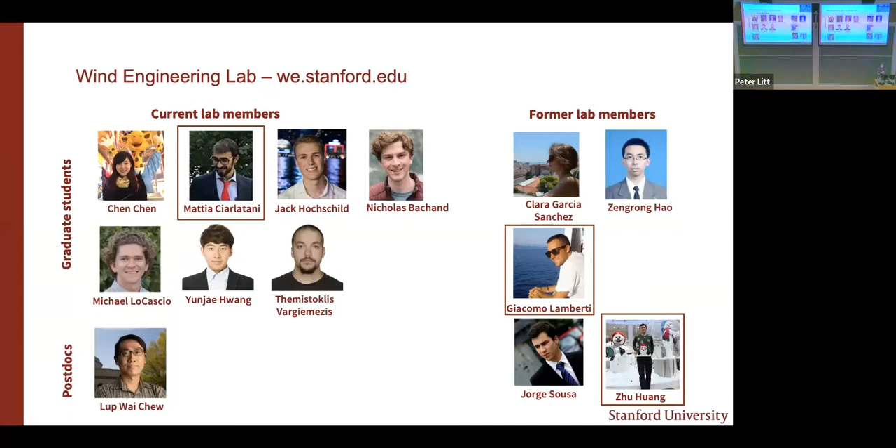I'll start by acknowledging collaborators from the Politecnico di Milano, because they provided the measurement data we've been using here, and from the Florida International University Wall of Wind, because we repeated the experiment in that facility to make sure we had double data. We have funding from NSF and the XSEDE computational resources. I also always like to start by introducing the people that actually did the work. My current lab members are on the left, and Mattia Ciarlatani is the person currently working on this topic. The former lab members, Giacomo Lamberti, contributed a lot to this work, and Zhu Huang, who was a postdoc in my lab as well.

This is the overview of the talk for today. I'll start by introducing very generally how I think about predictive computational wind engineering—what are the challenges, what are the opportunities, and what is our overall long-term goal. Then I'll focus more specifically on the topic of today's talk, cladding load predictions, discussing the specific objectives and the test case, and then we'll look at some results.

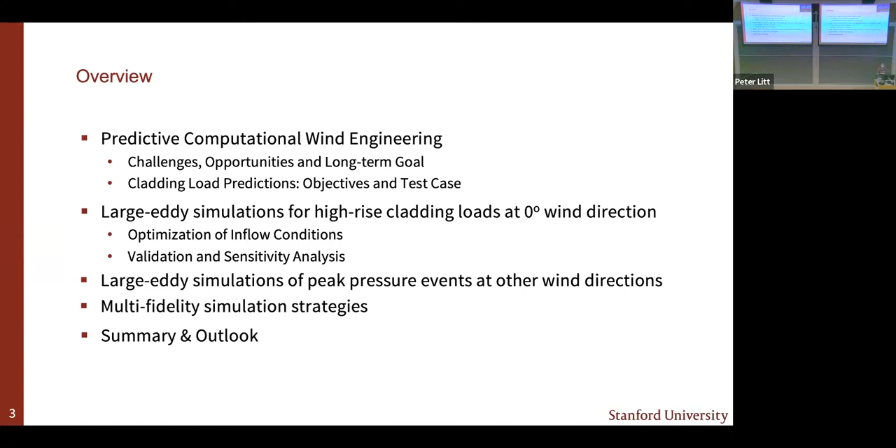I'll present large eddy simulations for high-rise cladding loads at a 0-degree wind direction, where the wind is perpendicular to one of the building facades. We'll look at how inflow conditions are very important, then validate the results and look at the sensitivity analysis. Then I'll move on to other wind directions, because the most negative peak pressure events actually occur at wind directions that are not perpendicular to one of the building facades. If I have time, I'll briefly cover some ideas and ongoing work on multi-fidelity simulation strategies, and then I'll end with a summary and an outlook.

Okay, so let's start with the overall introduction: computational wind engineering for sustainable buildings and cities, where sustainable is defined very broadly here. It means we want cities to be comfortable, healthy, energy efficient, safe, and resilient. There are quite a lot of flow challenges that play a role in making cities sustainable.

A very common challenge looked at in wind engineering is pedestrian wind comfort and even pedestrian wind danger, because when you put up a new high-rise building in a city, you can locally get speed-up of the wind flow around the building at pedestrian level. That can cause uncomfortable conditions, but also very dangerous ones—people have actually died from unsafe wind conditions and being blown over by wind. Many municipalities have criteria that must be satisfied during the design before you get a building permit. Traditionally, these things are studied in the wind tunnel, but computational methods could do that as well.

The second challenge is pollutant dispersion—thinking about how pollutants released within the urban canopy disperse through a city, and what that means for air quality and health. We also have natural ventilation, which looks at using the natural resources of wind and buoyancy to drive flow through a building. It's important both to reduce energy consumption for heating, ventilation, and air conditioning, and for health. We've known that for a long time, but I think the recent pandemic has made that very clear to the general public as well.

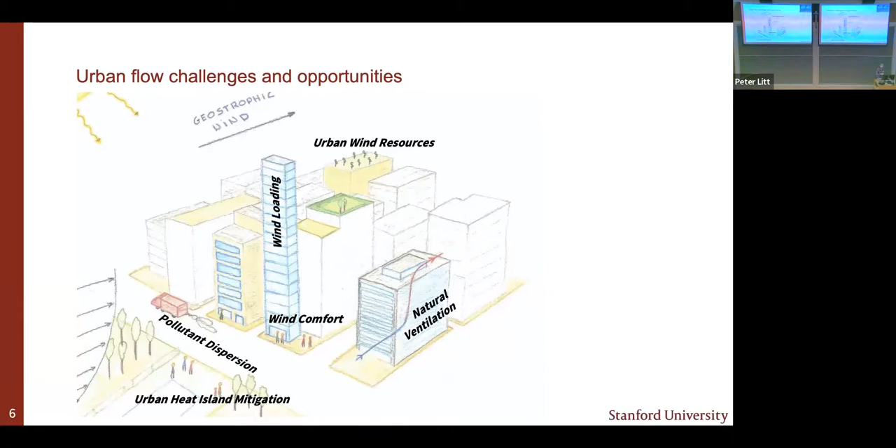And then the topic of today's talk is wind loading, and that really looks at how can we make our buildings more resilient to extreme wind events. And it's actually a very important topic.

In 2020, the insured loss due to extreme wind events was $57 billion. And most of the damage started by one of the cladding panels on a building facade or by cladding failure on a building facade. And once that happens, you get rain intrusion, which always comes with a high monetary loss afterwards. And you can get further failure because once one of the cladding panels fails, you get internal pressures as well in the building, and if one roof tile disappears, the whole roof is likely to be broken.

And it's a very interesting problem from a fluid mechanics perspective as well. That's what you see on the right in that graph on the bottom. It shows you a pressure coefficient, which is the non-dimensional pressure on a point on the building facade as a function of time. And you see that you get these very negative suction peaks.

So those are the ones that will really pull off these panels from the building facade. And it's tricky to measure these in the wind tunnel - to really understand, if you measure the pressure at one point, that is like a minus 10 CP, what does that mean for the load on an overall panel? And these are, of course, also challenging to predict in CFD.

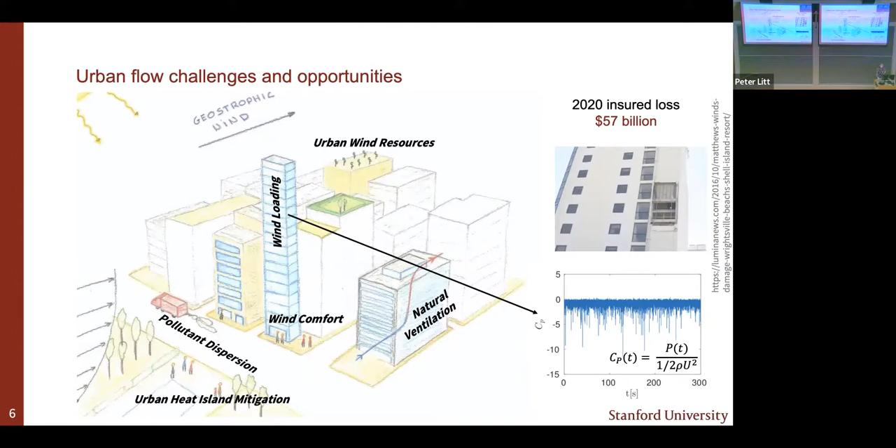So all of these problems have two challenges in common when we're trying to do the predictions. The first one is that you have a lot of variability in meteorological conditions. The flow in this city is driven by what happens at the larger scale in terms of the weather, right? And that is inherently variable.

So if you're trying to predict this, you need to have an understanding of what changes in weather will mean for the quantities of interest that you're trying to predict. The second is that we're dealing with very complex flow physics, right? This is a very high Reynolds number turbulent flow with very complex geometries. And then often you also get multi-phase effects.

In pollutant dispersion, you're looking at pollutant transport. There might be chemical reactions. For urban heat island mitigation, you would have to think about evaporation, condensation, etc.

There are also a lot of opportunities to try to predict these flows better. As we get more and more computing power available, we're able to run more accurate simulations, and we're also able to run more simulations, which means that we can start leveraging tools from uncertainty quantification.

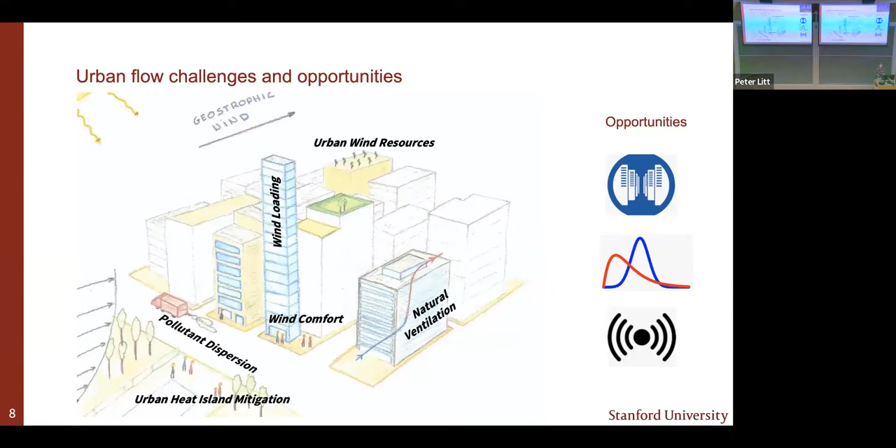And we can also start to think about data assimilation because we see more and more sensors being put up in urban areas that actually give us data in terms of local wind speeds, local temperatures, etc. So all of these actually mean that we can really start thinking about using computational fluid dynamics to do predictions of these quantities of interest.

And that is really our long-term goal in the lab: to establish efficient predictive modeling frameworks that can quantitatively support the sustainable building, design, and urban planning process.

And to achieve that goal, we're going to use tools from uncertainty quantification and data assimilation, and focus a lot on validation with field measurements, because the field measurements really represent the full complexity and variability of the problem that you would see in real life.

If you take something out and you put it in the wind tunnel, you're removing a lot of that variability and complexity.

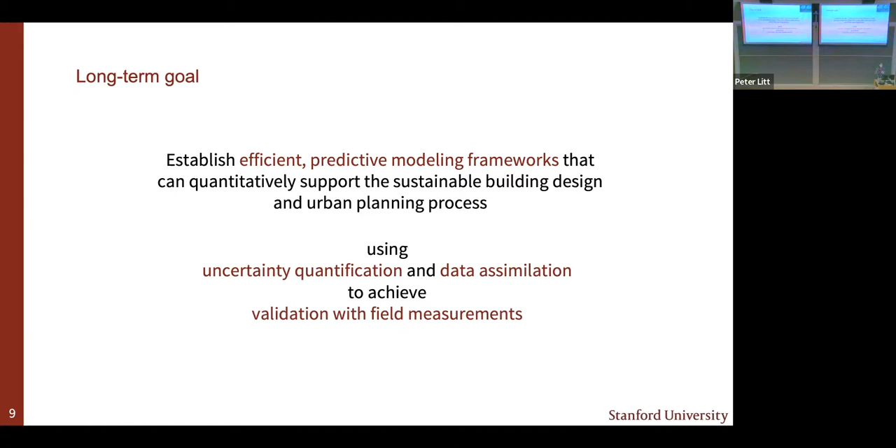Then we do propagation of these uncertainties by running a larger number of deterministic simulations, and you combine that information to get predictions of probability distributions for your quantities of interest. And then we can validate that against field measurements.

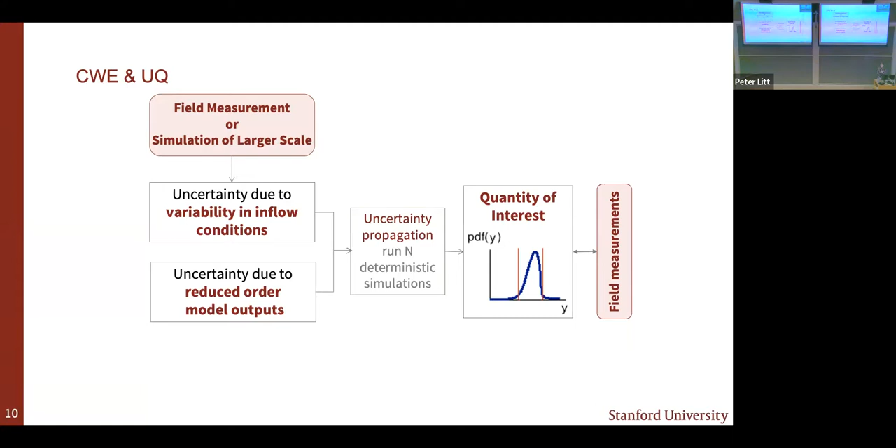And when you think about these two types of uncertainties, the inflow conditions is kind of a multi-scale problem, right? So there we're going to rely either on field measurements or on simulations of the larger scale weather forecasting simulations to understand what that variability in the inflow conditions is.

On the other hand, uncertainty due to the reduced order model outputs is more of a multi-fidelity problem. So there you'll have to look at high fidelity simulations or experiments to understand better what that uncertainty is and how you could characterize it.

And then lastly, we have the data assimilation. So if you do have field measurements, you can compare that to your quantities of interest and then couple back and really get a better understanding of what these uncertainties are in the field you do measure.

So whenever we develop frameworks like this, we start from an application, because the quantity of interest is really going to determine what the most important uncertainties are and how you're going to set up these frameworks. And we've kind of completed this whole loop on the topic of pollutant dispersion and the prediction of pedestrian wind.

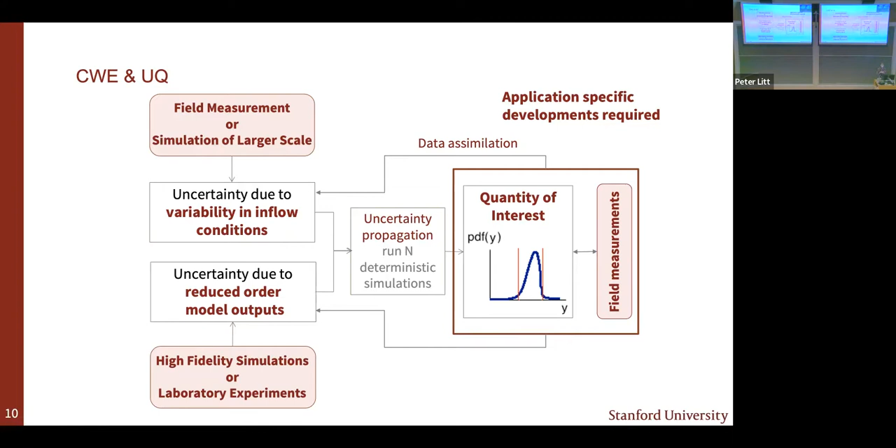And for natural ventilation, we've done all of the components as well. But when we started looking at wind loading, we realized that this is too far ahead. First of all, we don't have field measurements available of wind pressures on high-rise buildings. And second, we start from the point that we have some model that we trust at giving a reasonable prediction.

And currently, CFD is not accepted as a design tool for calculating wind loads on buildings. So our starting point was really these two observations: we don't have full-scale measurements on high-rise buildings, and CFD is currently not accepted as a design tool.

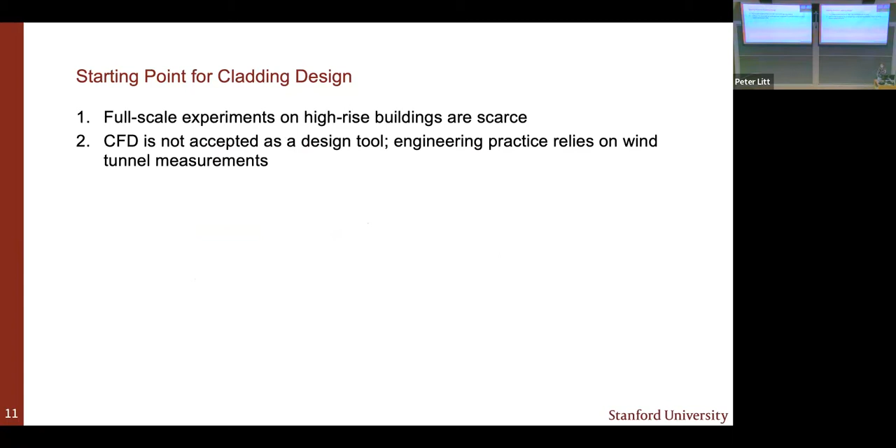So we took a step back and looked at what happens in these wind tunnel experiments, because that is really the way that engineering practice is going to calculate these wind loads. They will record pressure time series simultaneously in several points, usually up to 500 points, on the surface of a building - on the reduced scale model.

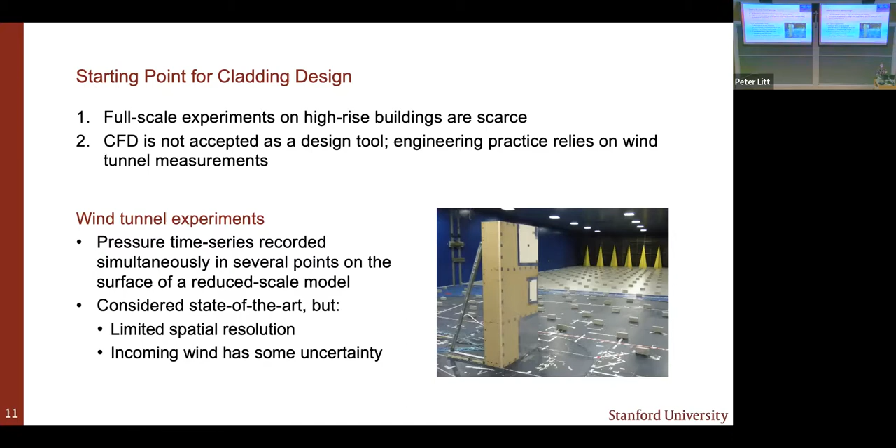This is considered state of the art, but even though they have 500 points, there are more than 500 cladding panels on the building, right? So they are limited in spatial resolution. And then second, there is some uncertainty in the incoming wind in these wind tunnels as well. They try to reproduce what is considered a full-scale wind field, but there are challenges in that - it's a little bit of an art.

So CFD really has something to offer here, right? If I put enough resolution in my simulation, I can actually calculate area average loads on the panels of the building directly. Now, the downside is that turbulence modeling is really key in this problem.

If you remember that signal of CP that I showed you in the beginning with these very negative pressure peaks, that is really due to turbulence in the flow. So if we want to predict these negative suction peaks that will determine the peak loads, we really need to think about it carefully. And we have two options there.

One is to go to Reynolds averaged Navier-Stokes simulations, which model all of the turbulence and solve only for the mean flow. That's going to be fast, but relatively inaccurate - or in this case, even very inaccurate - for these turbulent quantities. The other option is to go to large eddy simulations, where you resolve the larger scale turbulence in the flow.

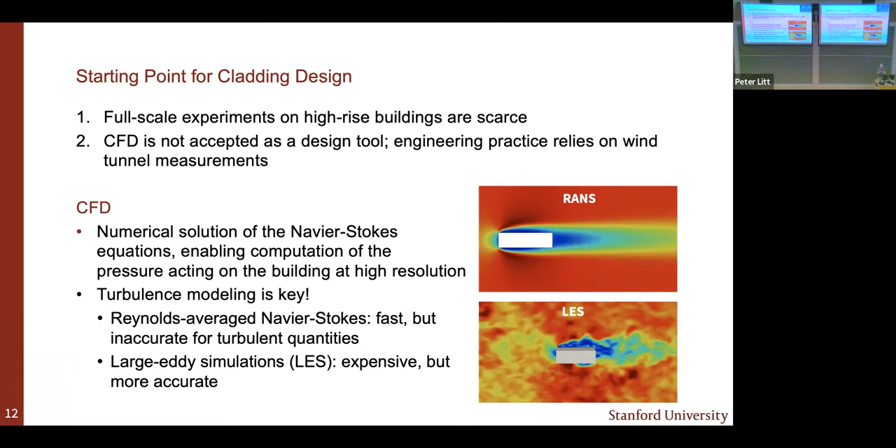And you will start to see these negative pressure peaks, right? That's going to be more expensive, but more accurate. Given the overall distrust still in the community with respect to CFD, we decided to go for the second approach. We're first going to show that if you take a good model, you can actually predict these pressure peaks as you do in the wind tunnel.

So this has been our starting point here. I've reduced the framework, and because we go to high fidelity simulations, we're not going to think right now about uncertainty in the reduced order model outputs, but we are still going to think about uncertainty because there is variability in the inflow conditions. And then we're going to validate with a wind tunnel measurement.

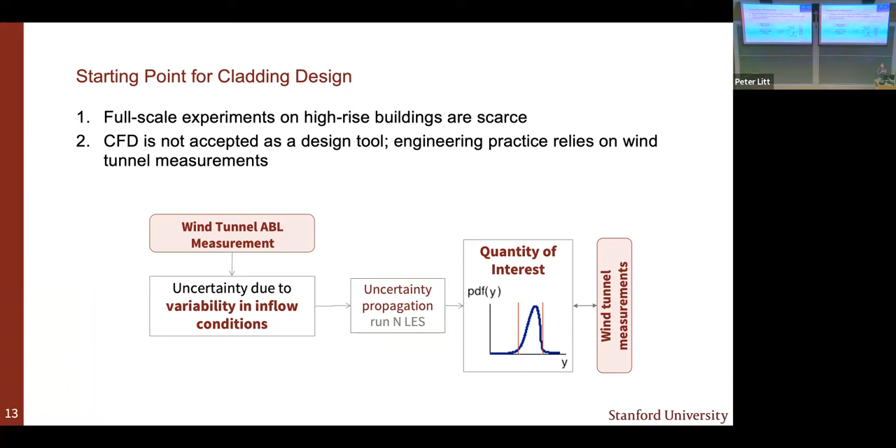So we have wind tunnel measurement data available. We are going to look at what the uncertainty in the boundary layer in the wind tunnel was, and then propagate that through the LES.

So to do this, we selected this test case. It's a rectangular plan building. It was put in the atmospheric boundary layer at the Politecnico di Milano, in the wall of wind. The building was 2 meters high, 1 meter long, and 0.3 meters wide.

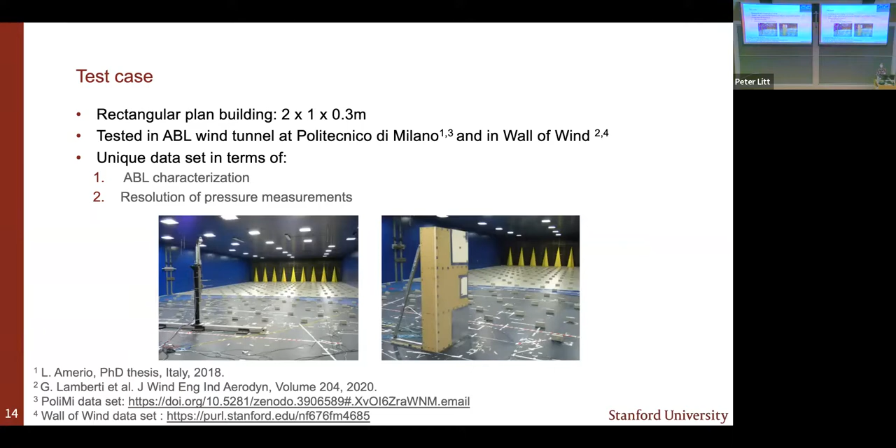So in terms of that characterization of the boundary layer, they did 3D measurements. Are there questions in the meantime that you want me to address, or not really? Okay.

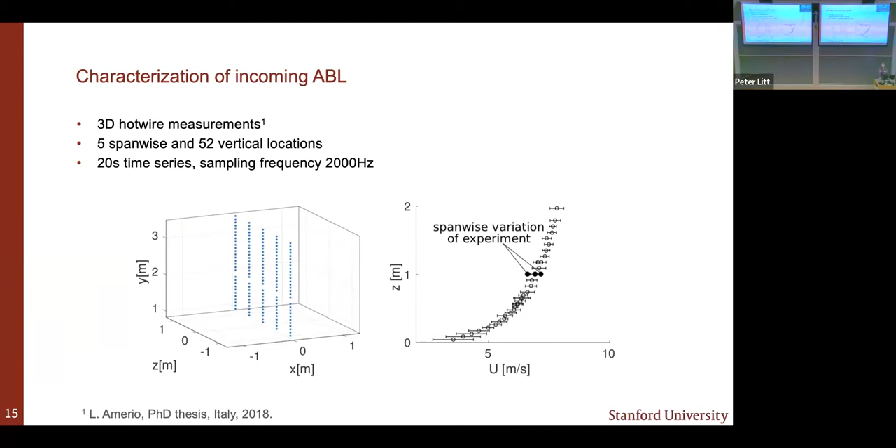There are 3D hot wire measurements at 5 spanwise locations and 52 vertical locations, with 20-second time series sampled at 2000 hertz. This allows us to look at profiles of mean velocity, as well as turbulence intensities in the 3 directions, and see the variation in the spanwise direction, which is a measure of uncertainty in that boundary layer in the wind tunnel.

The pressure measurements are shown in more detail here. They focused on these 2 tiles, A and B, and you can see a zoomed-in picture of how high the resolution on these tiles really is. We have 300-second time series with a sampling frequency of 500 hertz.

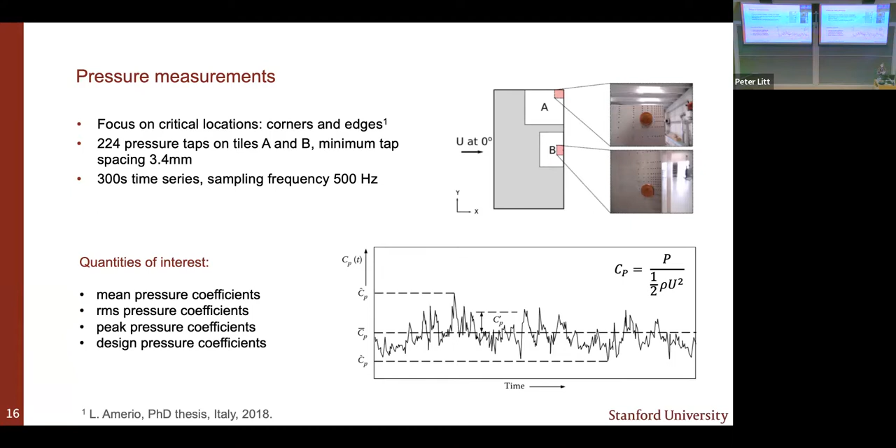Our quantities of interest are the mean pressure coefficient, so we look at pressure coefficient time series, the root mean square fluctuating pressure coefficient, CP prime, and peak pressure coefficients. The peak pressure coefficients are obtained by doing extreme value analysis of that time series. Then there are design pressure coefficients, which I'll explain later how we get exactly.

Let's look first at the 0-degree wind direction, so the wind perpendicular to the building. We started by running these simulations with OpenFOAM because it's a code that is very widely used by the community. If we could validate that we can do these predictions, that would really have an impact on what engineering practice could do.

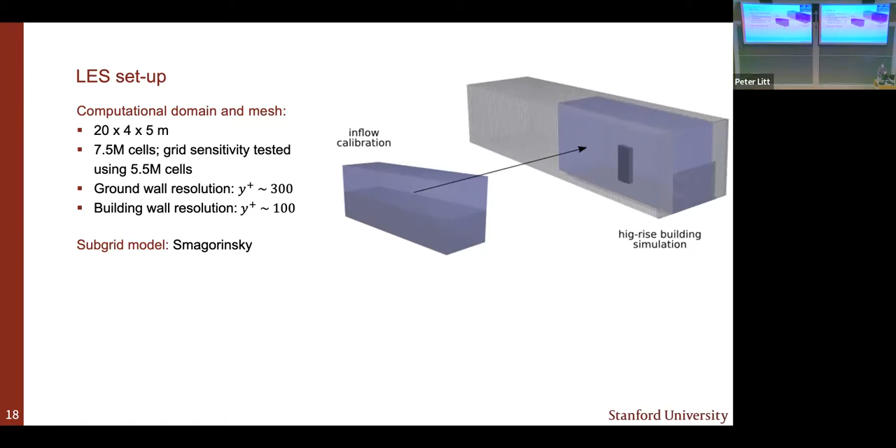Our domain is 20 meters long, 4 meters high, and 5 meters wide, similar to the Politecnico di Milano wind tunnel. We have 7.5 million cells, and we checked grid sensitivity as well. We use a very simple standard Smagorinsky subgrid model. This is some detail on the schemes and the time stepping.

The simulations took quite long, and we couldn't really speed that up much more because the main challenge here is that we need really long time series to do our extreme value analysis. So we've maxed out on the scaling in terms of parallelizing it, and we'd be using more CPU hours while only reducing the time a little if we went to more processors.

Our boundary conditions are periodic at the sides, no slip on top. We have a smooth log-law wall function on the building and a rough wall function on the ground. But the most important one is that we know the pressure coefficients are sensitive to the turbulence in the incoming flow, so what do we do at the inlet of the computational domain?

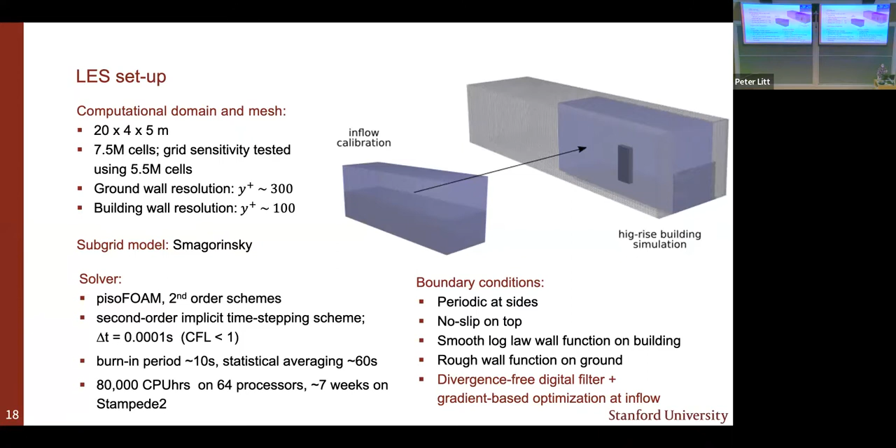We use a divergence-free digital filter, but we combine it with a gradient-based optimization to make sure we really get the quantities we want. So how does that work?

The digital filter is a version proposed by Kim in 2013, which specifies a mean velocity profile that is a logarithmic law as a function of height, as expected in a wind field. Then we add a fluctuating field on top of that, a function of the Reynolds stress component magnitudes and the time scales for the U, V, and W components. You generate a random field that is filtered to achieve these correlations with the desired length and time scales, and scale it using these magnitudes of the Reynolds stresses.

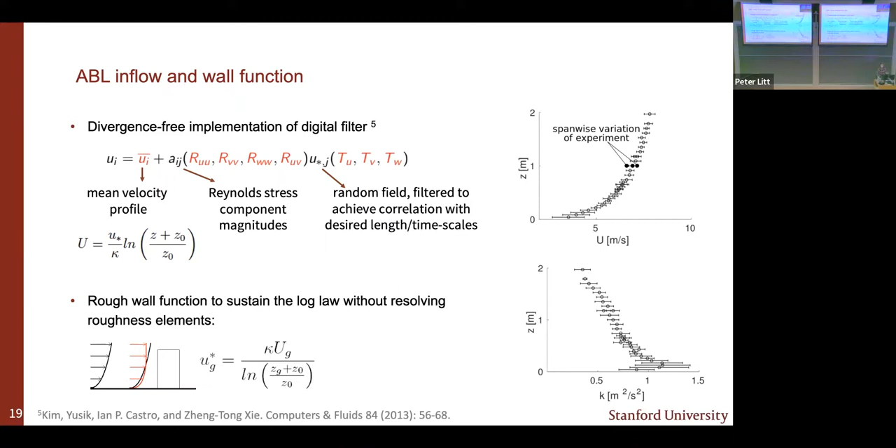In addition, we use a rough wall function so that we sustain that log-law without having to resolve the roughness elements you saw in the wind tunnel, which would make the simulations a lot more expensive. This sets up the inflow very nicely, but you run into a problem common with these synthetic turbulence generators: the synthetic turbulence is not a solution of the governing equations, and as we move downstream in the domain, you see a decay of that turbulence intensity.

So now if in the future I put a building in my simulations, I'm very likely going to see much lower fluctuations in my pressure signal because I have lost that turbulence.

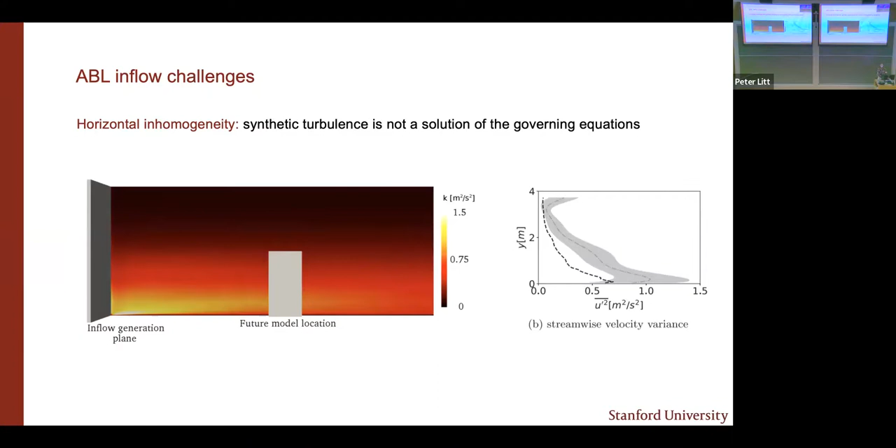So we did a relatively simple workaround: you specify that inflow, then look at what the statistics at the building are in a simulation that doesn't have a building, but at the future building location. You check how those values compare to what you had in the wind tunnel experiment. If that's good enough, you go ahead and run a simulation with the building; if not, you do a gradient-based optimization adjusting this until you satisfy the criteria.

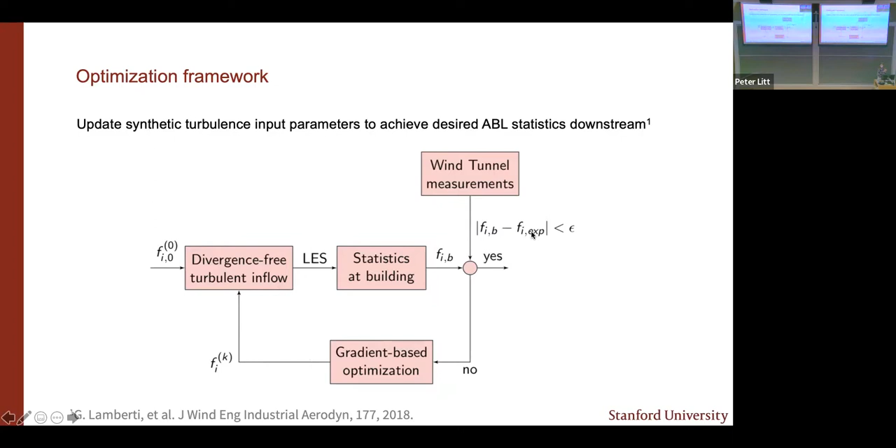That works really well. And it also gives us a tool to start looking at sensitivity analysis. So that's what we did as well.

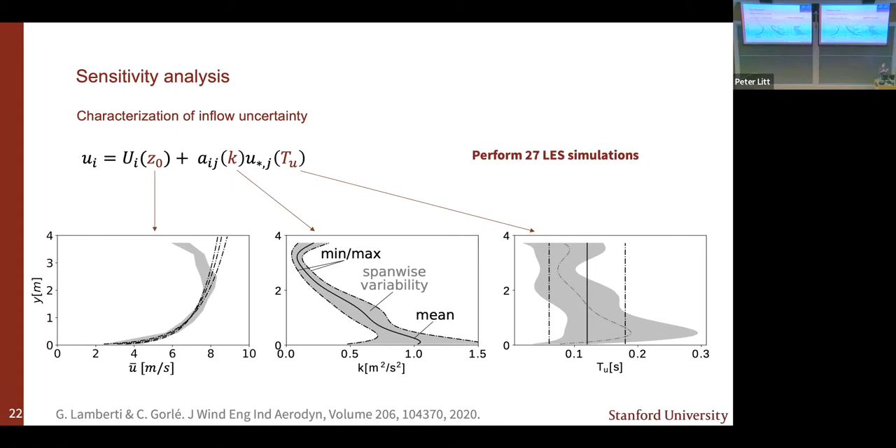We characterized the inflow uncertainty by having 3 uncertain parameters in the inflow. The first is the roughness height, which changes our mean velocity profile shown in the plot on the left. The second is variability in the overall level of turbulence kinetic energy in the flow. And the third is that we changed the time scales to vary corresponding to the variation we saw in the wind. We ran combinations of all of these: 3 values for each parameter, giving 27 simulations in total.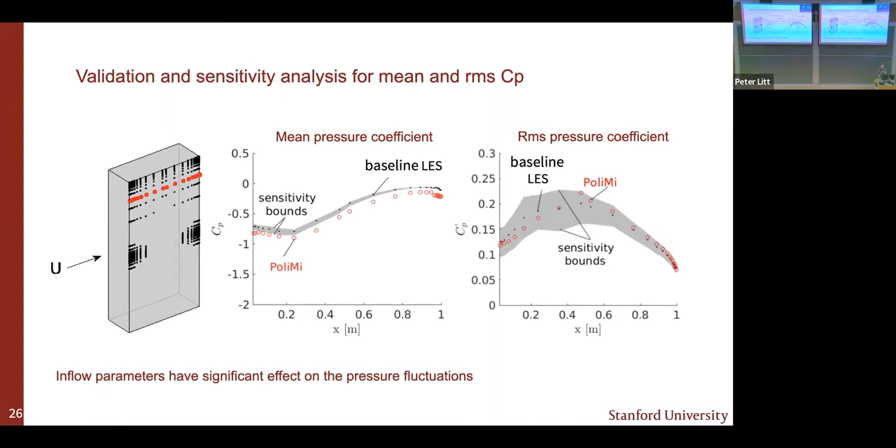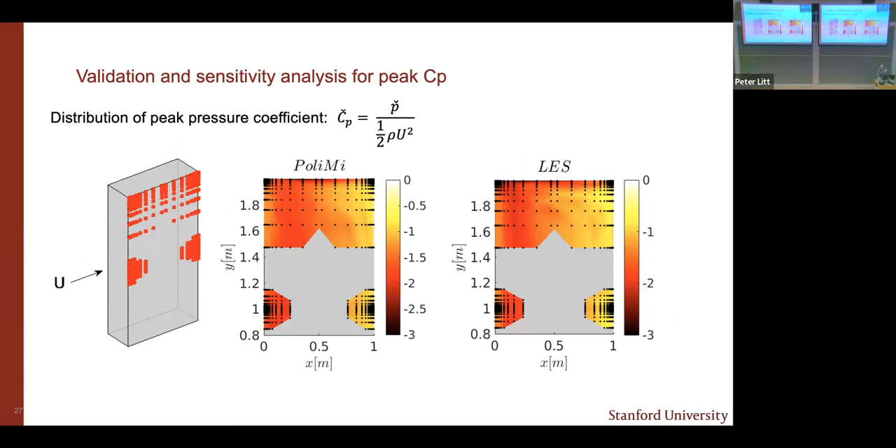Then if we look at peak pressure coefficients, we see that the LES reaches as negative values as the experiment. This picture shows the most negative values we got in the 27 simulations. If we compare the baseline LES to the Milan experiment, we're slightly under-predicting these peak pressure coefficients, but again the sensitivity bounds explain a lot of the discrepancy. The other important thing to note is that we're still doing an LES, solving filtered equations, so we shouldn't expect to resolve these peaks as negatively as in the wind tunnel experiment.

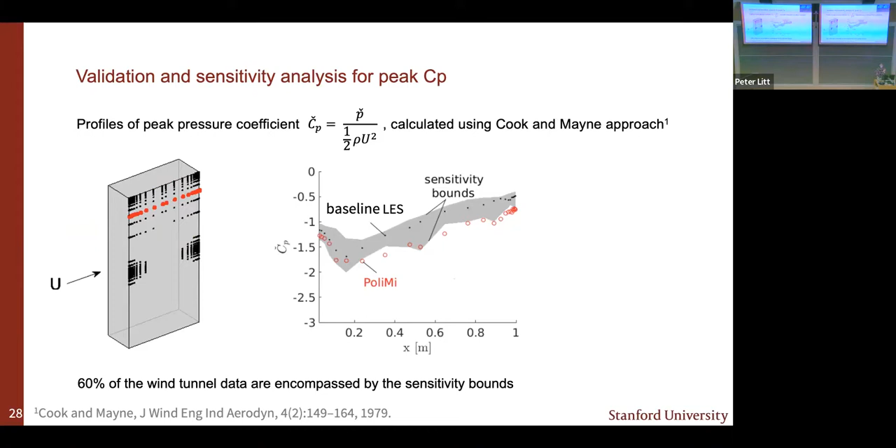You could try working with subgrid modeling to account for that difference, but the question is, is that important from a design point of view? From a design perspective, you don't care about the pressure at one location, you care about the overall load on the cladding panel. That's what is being shown here.

This is a panel at the mid-height of the building, and the red dot is the pressure tap where we're plotting the raw data, shown as the yellow curve, for two different time series where we saw a negative peak. If you take the area average on the panel, shown in blue, you get the blue curve, and you're actually filtering out these peaks, which is what your large eddy simulation is doing as well.

If you have enough pressure taps available on a panel, you can calculate that area average. In most wind tunnel experiments, they wouldn't have that, so instead they do a time filtering, using a time scale for the filter that is some constant multiplied by a length scale, usually the diagonal of the panel, and the free stream velocity at building height. That is actually one of the main challenges in the wind tunnel: determining what that constant should be.

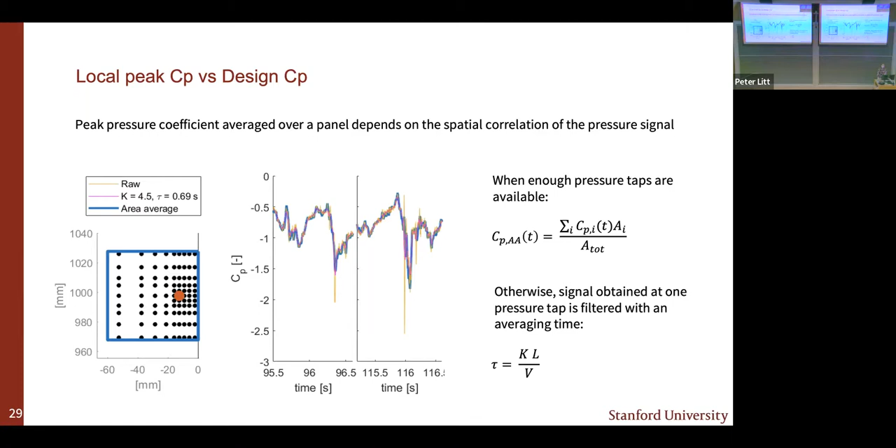Because you see here that the 4.5 value, which is the magenta signal, corresponds quite well to the area average, but the constant actually depends on where you look on the building facade, what wind direction you're considering, etc. So with CFD you wouldn't have to do any of this, right? Because you can always calculate the area average load as long as you have a reasonable number of grid cells on a panel. And that's the comparison I'm showing here.

So we look at the 0-degree wind direction at the top corner here, and we look at different panel sizes, going from very small panels to much larger panels. That's what you see on the x-axis here, small panels to larger panels. And then the area average peak pressure coefficient on that panel is shown here.

So we did an extreme value analysis on that area average signal, and you see that now the sensitivity bounds really fully encompass the data that we have from the experiment. So the LES can predict these peak design loads on panels really well, quantitatively.

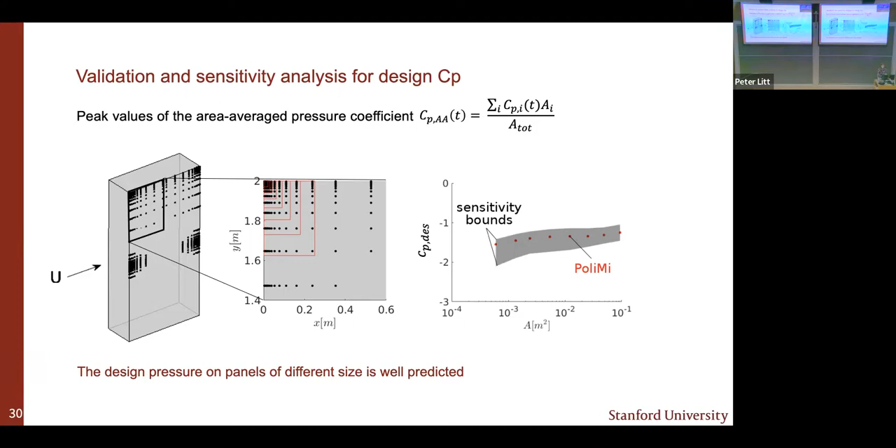So that concludes the analysis for the 0-degree wind direction, where we've shown that LES can reproduce these pressure coefficient statistics, and we can directly calculate peak pressure loads over areas of interest. We've also shown that the root mean square and the peak values are highly sensitive to the turbulence in the atmospheric boundary layer flow at the building location. So you can't just look at the inflow, you really need to think about what happens at the building location, meaning a very careful calibration of these inflow conditions is needed.

So what are the takeaways here? Experimental data sets should really report detailed boundary layer turbulence characteristics, including uncertainty intervals, because if you don't have those, it's going to be really tricky to do validation. The LES should then account for that uncertainty when comparing results.

It also tells us that we need to do more full-scale measurements in real atmospheric boundary layer flow and in real extreme wind events, because the relationships being used right now to determine turbulence intensities and turbulence length scales start from the idea that you have a synoptic high wind speed. It doesn't account for what happens in a downburst or in a hurricane, etc., and those turbulence characteristics might be quite different, which would really affect what peak pressure loads you're going to see.

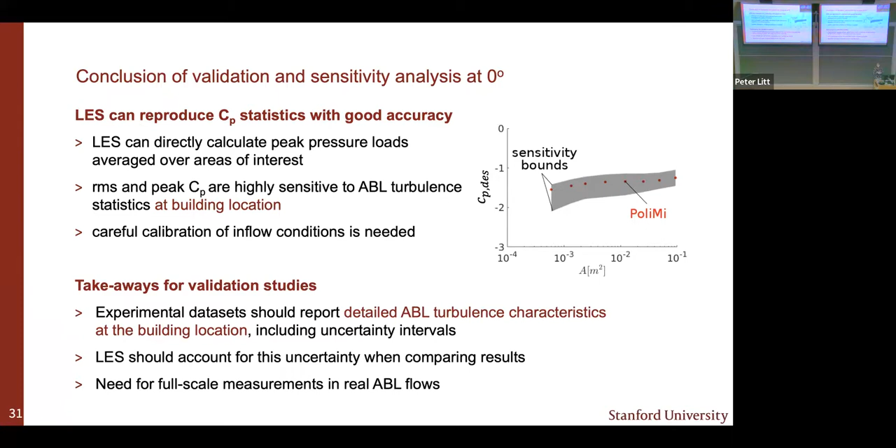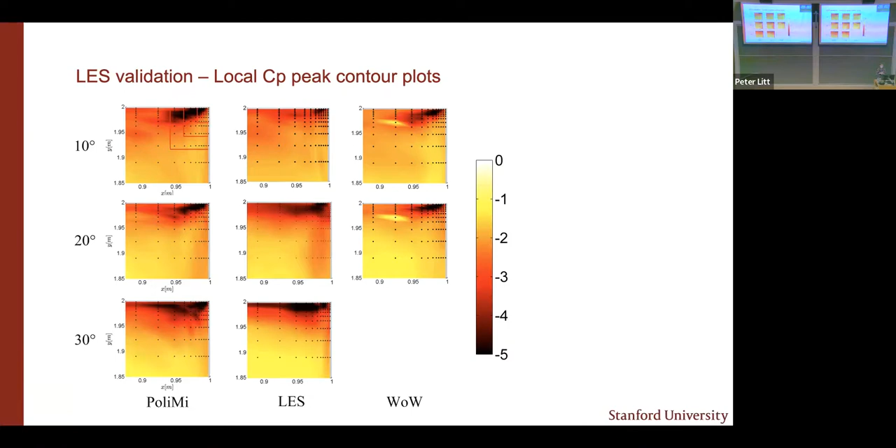So the validation is done with this, right? Now the idea is, can we understand better what is really happening? The way that we looked at the flow is by plotting these isosurfaces of Q criteria, and then we colored the eddies by the sign of the X component of the vorticity, which basically tells you the rotation of the eddies. So you could expect that if you have two eddies rotating in the same way and they merge, you're going to get stronger, right?

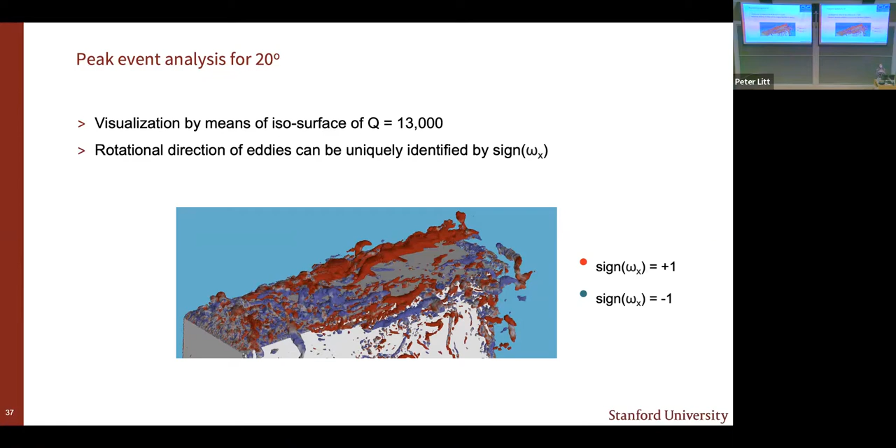So you're going to get these more negative pressures. That's what you'll see in this movie. The wind direction is from here, and you get this big vortex overall along the edge. But you also get a lot of shedding further downstream, and these structures kind of move over the roof and then over the edge and join the structures on this side.

This is a back view, so this corner here is the same as this corner here. We have time series at 3 pressure taps near this back corner, shown here—tap number 1, number 2, and number 3. This is the contour of the instantaneous pressure coefficient. I'll play this once, and then go back and stop it at a few critical locations.

You see that this structure causes this very negative pressure, right? And if you look, you see some of these very negative spots. Now you get a very negative, very local peak. You're going to see one coming up here as well, a very negative peak. And then the most negative one is actually seen right at the corner of the building. So if I go back to what you see there—this is always a little challenging.

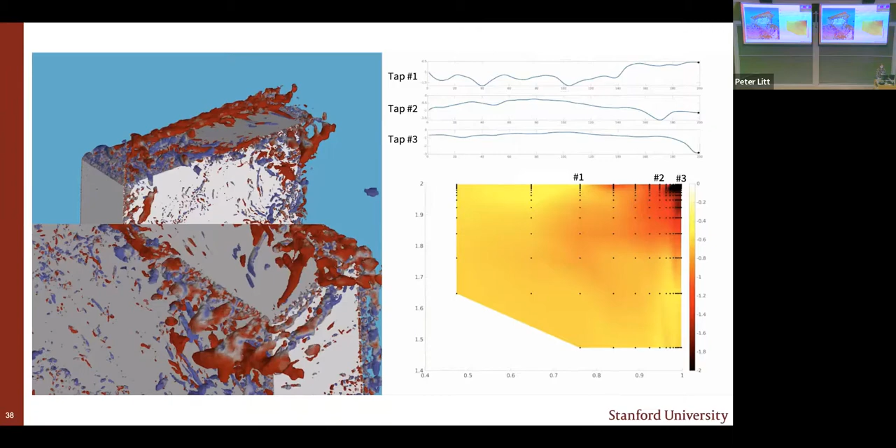So the simulations can not only predict these, but they can help us look in more detail at what is happening. We're still working on processing this data and getting more insight from it. The conclusion for these other wind directions is that we can reproduce the CP statistics with good accuracy at all the wind directions, including highly localized extreme suction events, given that we have a sufficiently fine grid resolution. That is, of course, very important.

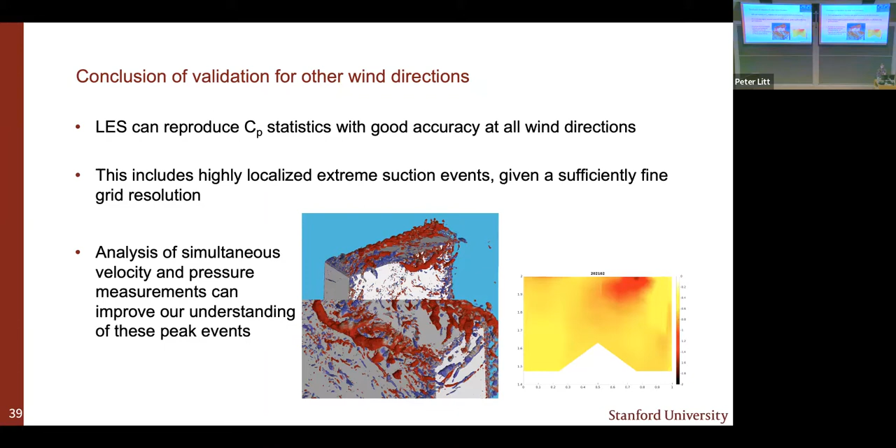And then finally, the LES simulations allow an analysis of simultaneous velocity and pressure measurements, which is really difficult to do in a wind tunnel. That can really help us improve our understanding of these peak pressures. Okay, so I do think I have time to go into the last section here.

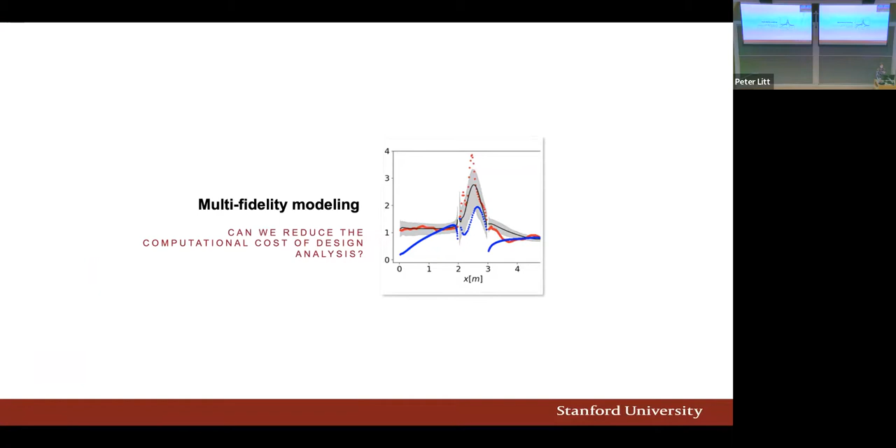I'll talk a little bit about multi-fidelity modeling, because we've seen that LES can do this, but it is, of course, quite expensive. The Charles simulations took us about 4 weeks. If we're not trying to really resolve these very localized events, we could probably reduce it to 2 weeks, maybe get it under a week.

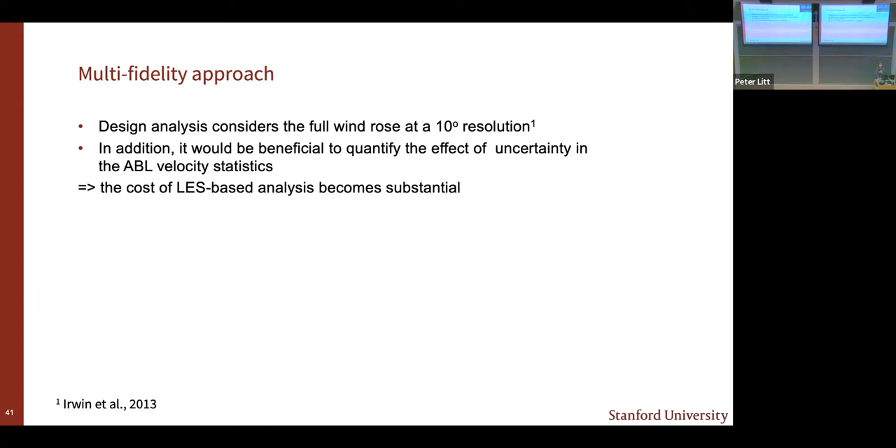But we would still have to do the analysis for all of the wind directions, and generally this is done with a 10-degree resolution. In addition, we've shown that the results are very sensitive to these boundary layer characteristics, so you would like to do some sort of uncertainty quantification there as well. So we're talking about running 36 simulations, and then maybe 3 times 36 to look at uncertainty, right? So that cost becomes very substantial.

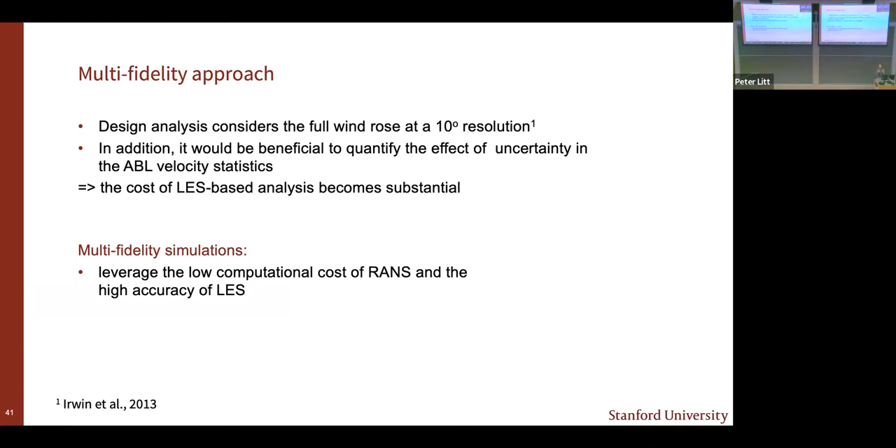So the idea is if we can leverage the low computational cost of the RANS simulations, which we know can't accurately predict the turbulence quantities but might have some useful information, together with the high accuracy of the LES. The starting point we used is: we'll do RANS at the 10-degree resolution or even finer, since these simulations take a few hours, and then we'll do LES at a smaller subset of wind directions, and try to combine that information to get accurate predictions at all of the wind directions.

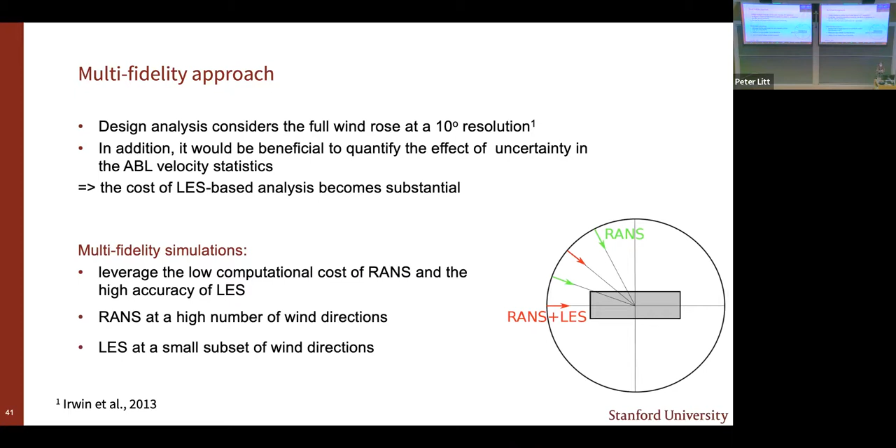We're trying lots of different approaches. The one written up right now uses machine learning. We use high fidelity LES data for the CP prime and relate that to low fidelity features from the RANS simulations—a mean pressure coefficient, non-dimensional turbulent kinetic energy, the inlet velocity, the norm of the pressure gradient, and the friction coefficient.

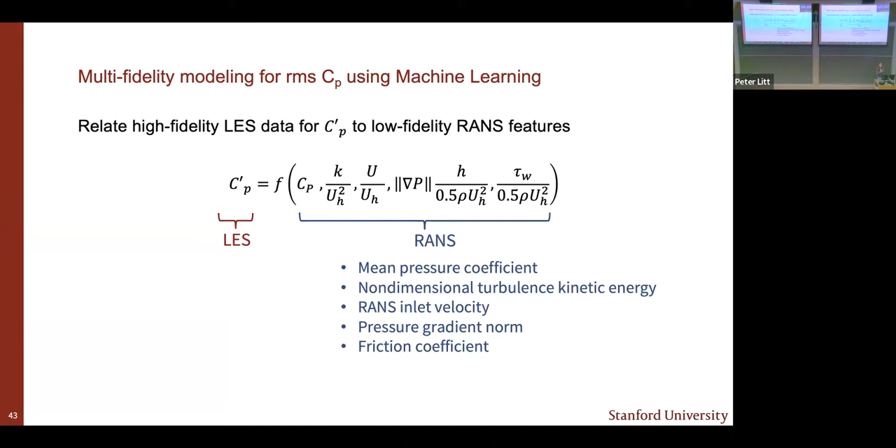We did a model search on a validation set for the 45-degree wind direction to come up with the overall setup of the neural network. Then we did a data split for training and test data by using half of the wind directions for training and the other half for testing.

We have 42,000 data points per wind direction. We also use bootstrapping, sampling the training data with replacement, so we can get confidence intervals on these predictions.

The first thing we did was throw all the training data in and try to come up with one model that would predict all the test data across all wind directions. It works, but it wasn't that good.

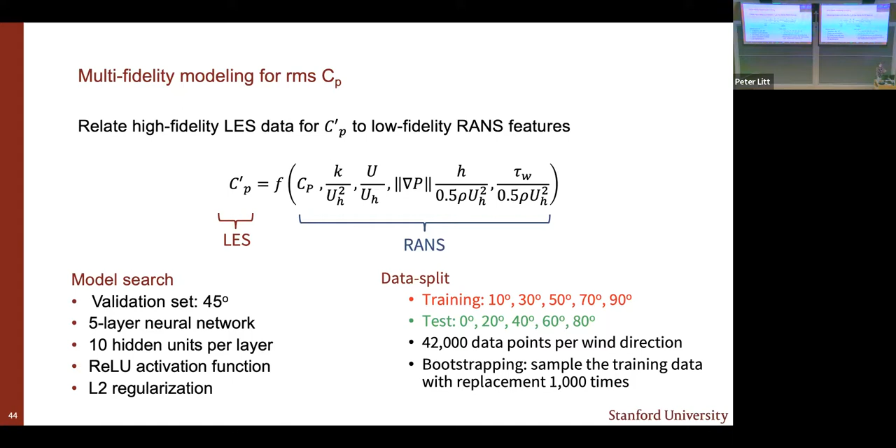So we took a step back and asked: can we think more carefully about which training data is best to predict certain wind directions? We did a principal component analysis of these features and found that 99% of the variance in the RMS CP is explained by the first two principal components in the feature space. X1 and X2 are these principal components, shown here for both the test and training data.

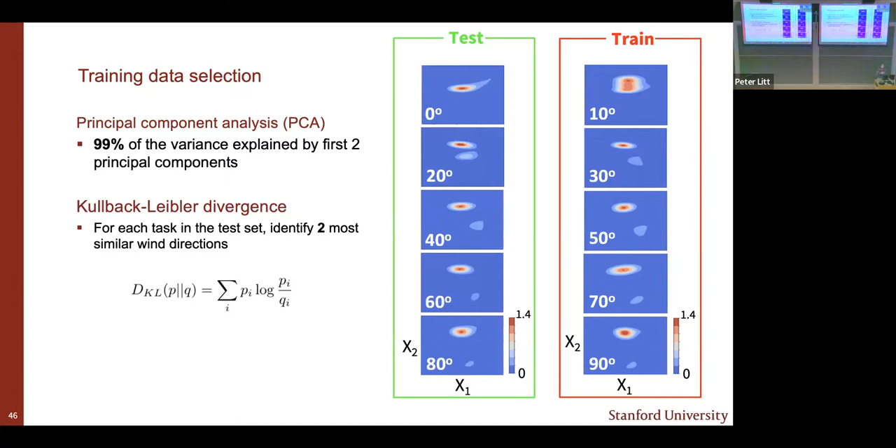We looked at which ones are most similar using the Kullback-Leibler divergence to identify the two most similar wind directions. For example, for the 0-degree case, the 10-degree and 90-degree cases actually carry the most information.

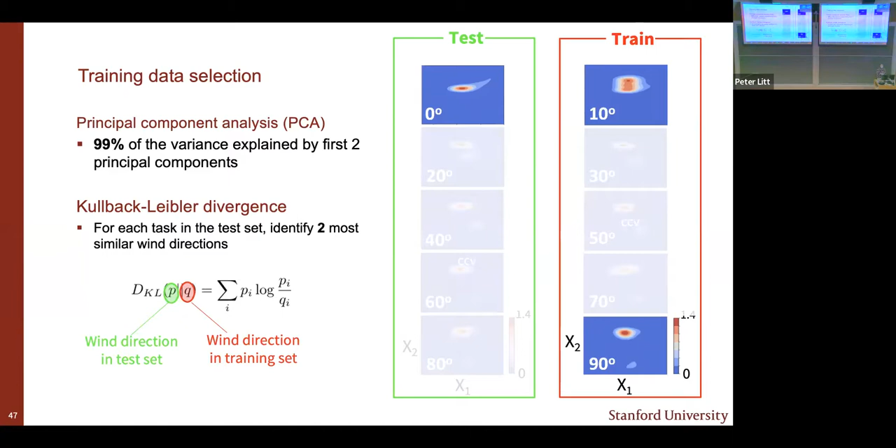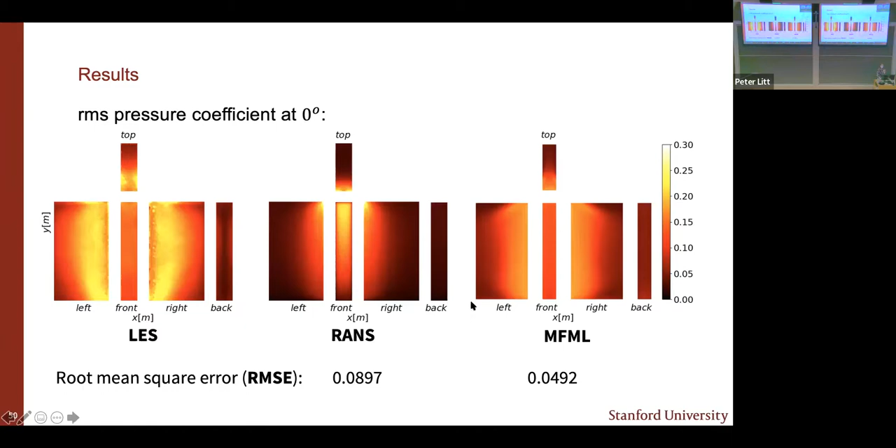If we look at the 0-degree wind direction, however, it doesn't work as well. The LES gets much higher values in the separation regions on the side surfaces and on the building roof than what we see in the machine learning model.

So we went back to look at the features, and we found that this part of the feature space corresponds spatially to the locations on the building where we're not doing well in our predictions. That's also the part that's absent in our other data sets. It's the same problem as with all machine learning—once you start extrapolating, you can no longer have confidence in the results.

So really thinking more carefully about how we select training data and test data is going to be key to improving the accuracy of these multi-fidelity methods. We're exploring other ways too—we've done multi-fidelity polynomial chaos expansions, multi-fidelity kriging methods, and so on.

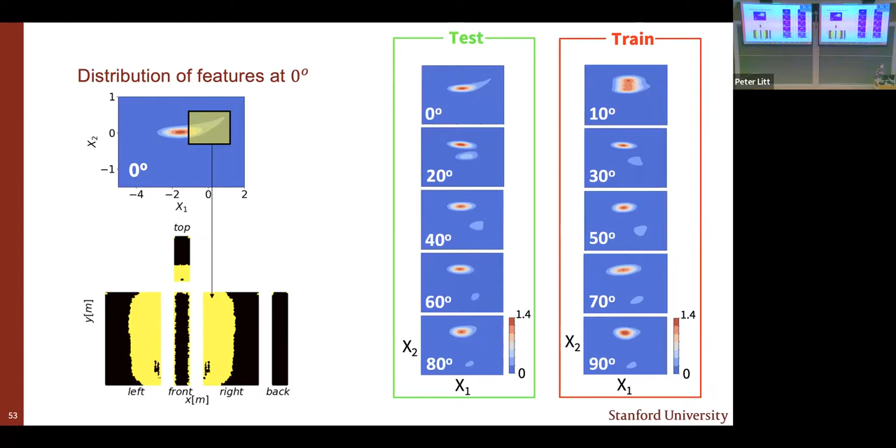In conclusion, these multi-fidelity methods do show potential to decrease the overall turnaround time for engineering analysis. Machine learning can help with estimating complex error patterns. We've seen that this can be trickier with polynomial chaos methods, for example.

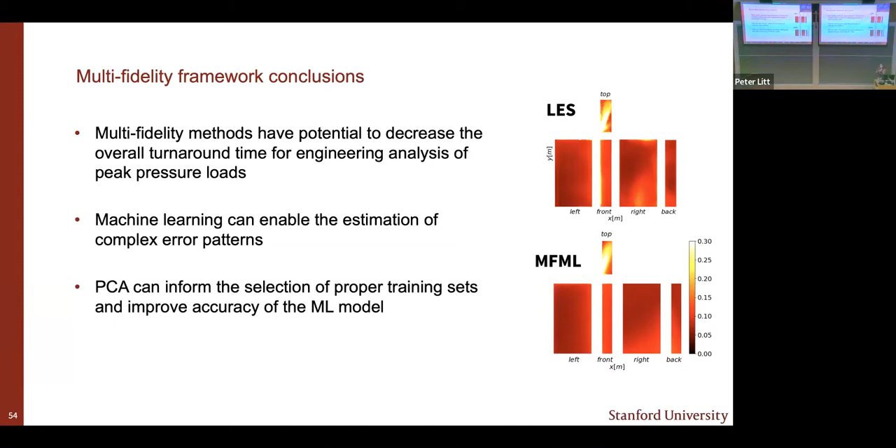Principal component analysis can inform selecting proper training sets and improve the accuracy of the machine learning model. It can also help in advance to identify where the model might not work, since you're able to see from the RANS features which areas might not be covered.

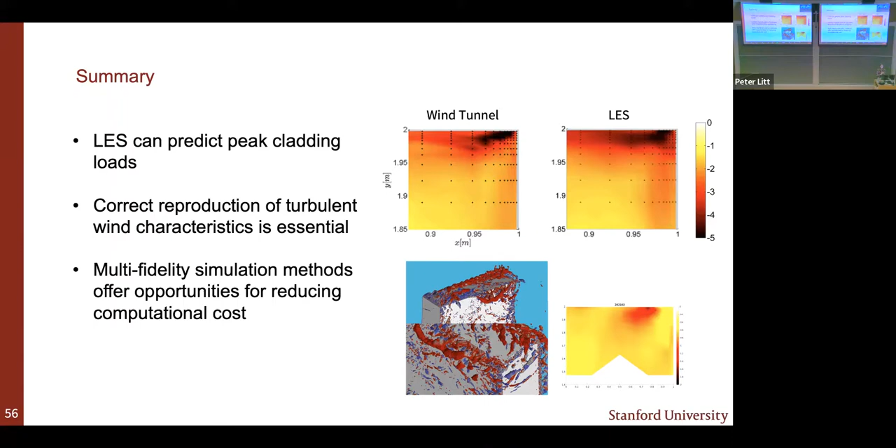Summary and outlook: I think we've shown that LES can predict peak cladding loads, but correct reproduction of turbulent wind characteristics is essential. Multi-fidelity simulations do offer opportunities for reducing computational costs, so we'll be doing more research on that.

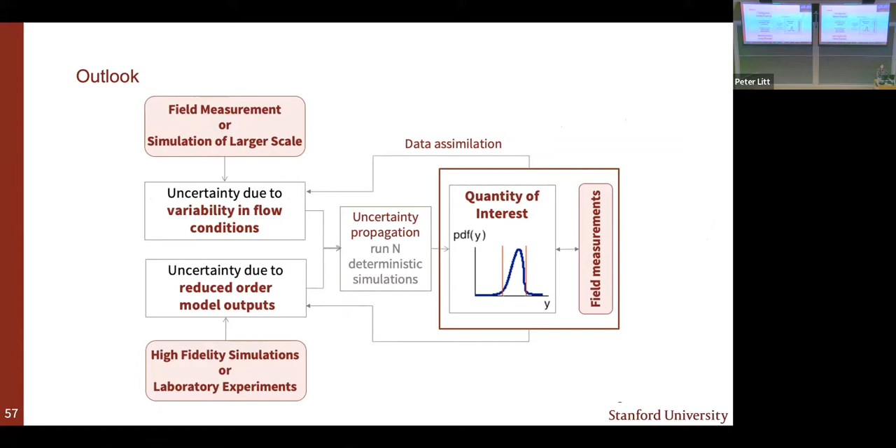Overall, we're really hoping to move toward a full framework for the wind loading problem. We've been working on a couple of components here—first and foremost, developing a sensor that can actually measure full-scale pressures on high-rise buildings.

We're going to be deploying it on the Space Needle in Seattle and on a high-rise building in San Francisco, with simultaneous boundary layer measurements in upstream locations. Getting more velocity measurements in extreme conditions is also very important.

We'll be working more on multi-fidelity simulation approaches. And a little less exciting, but very much needed, is to establish guidelines and benchmarks for building codes and standards. Today, the building code explicitly says you cannot use CFD for calculating wind loads, and I think we've shown that that should not be in there anymore, but we do have to provide guidelines for practitioners to do it correctly. So that's all I had, and I'll be happy to answer questions.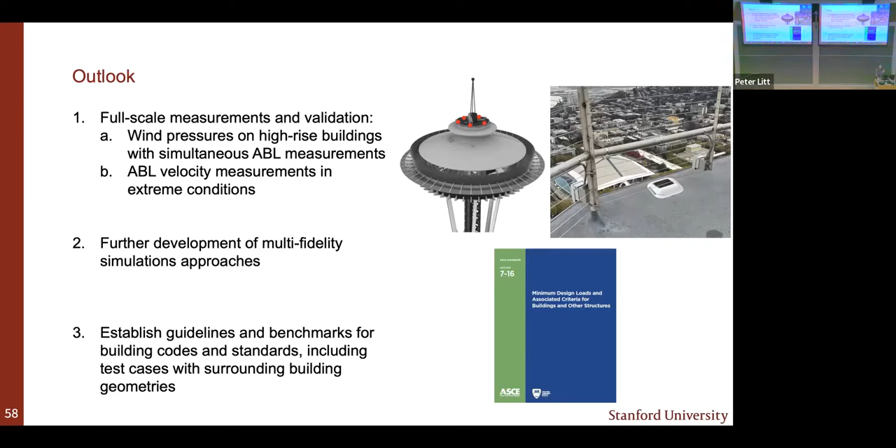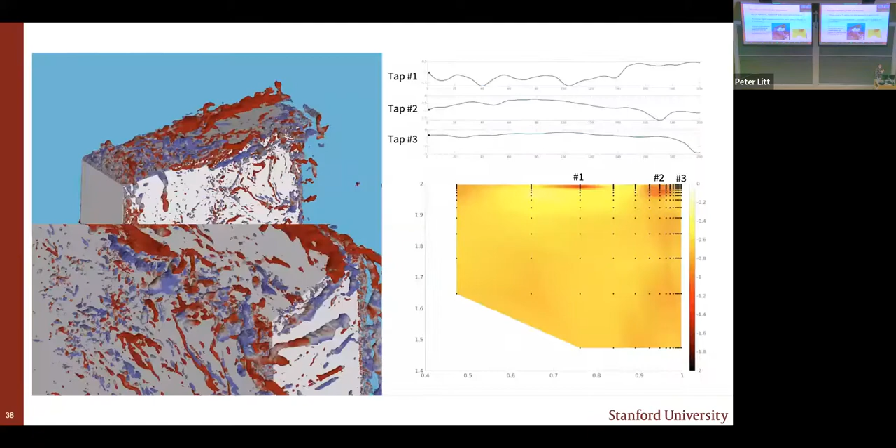No, they occur periodically, and you can actually see that in the pressure time series. The challenge with these is really to save enough data surrounding the peak to do the analysis well. So going back to this: the -3 happens quite frequently, while the more negative ones happen less frequently. They follow a log-normal distribution when you plot the pressure coefficient distribution, so the -3 happens relatively frequently.

Thank you for the nice talk. In the experiment, did you observe vibrations in the building? I don't know if you see this in one of the pictures — they do everything they can in the experiments to avoid vibrations. The model is reinforced on the inside, and it has a huge structure attached to it on one side as well to keep it from vibrating. We've done tests with and without that at low speeds to make sure it doesn't have any impact on the actual pressures measured.

It's a key challenge. We're planning to do wind tunnel measurements on the Space Needle too, and designing that model to not vibrate in the wind tunnel is tricky. It really depends on the structure you're looking at. When we do the measurements on the Space Needle, we'll put an accelerometer in as well to understand what the vibration is. I think the high-rise we'll look at in San Francisco isn't that high, so we won't see significant fluctuations — it really depends on the structure. I'm very interested in fluid-structure interaction, but that's a whole other level. So maybe in 5 or 10 years.